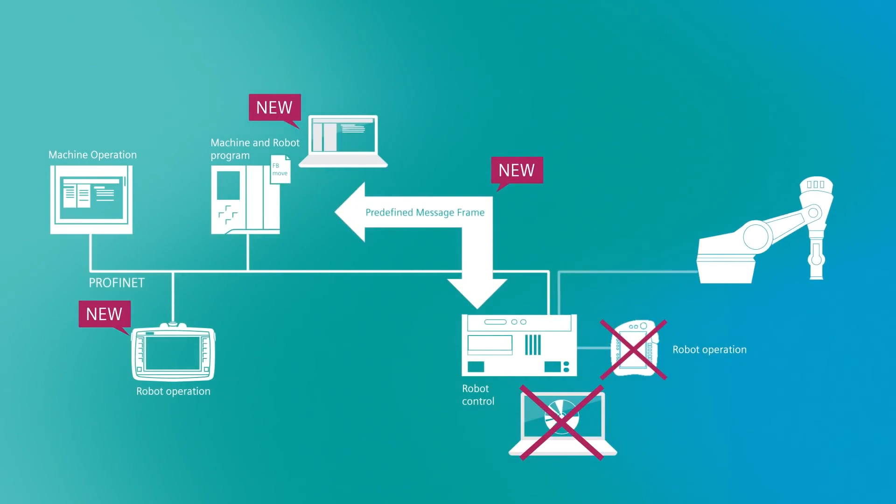Robot manufacturers such as KUKA, Denso, and Stäubli provide function block libraries that allow the robot to be programmed in the TIA portal. These libraries contain function blocks for various traversing movements, such as linear traversing or stop robot. This creates an opportunity to perform complete engineering of the system and robots solely within the TIA portal.

We also offer you the chance to perform robot operations via a Siemens HMI. For this purpose, we provide you with a standardized user interface for different robot manufacturers. We would like to show you this now in a live demonstration. Exactly, Tobias. Let's do that by taking a look at the application example in the TIA portal.

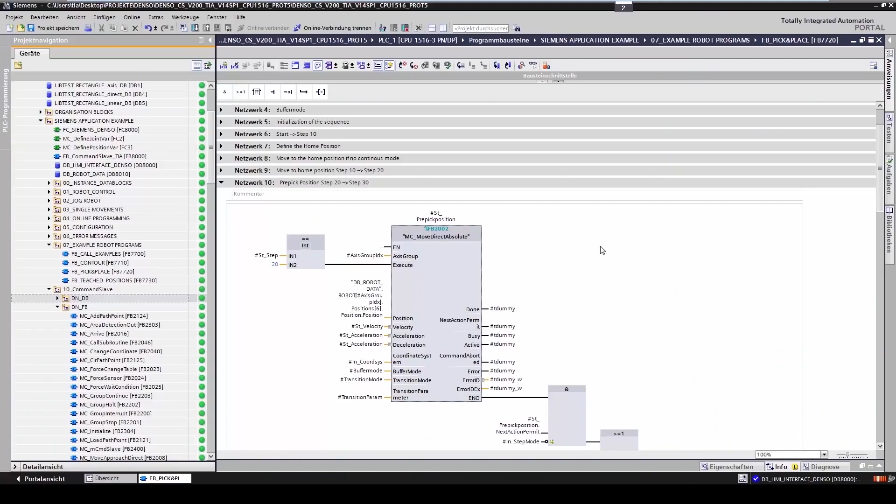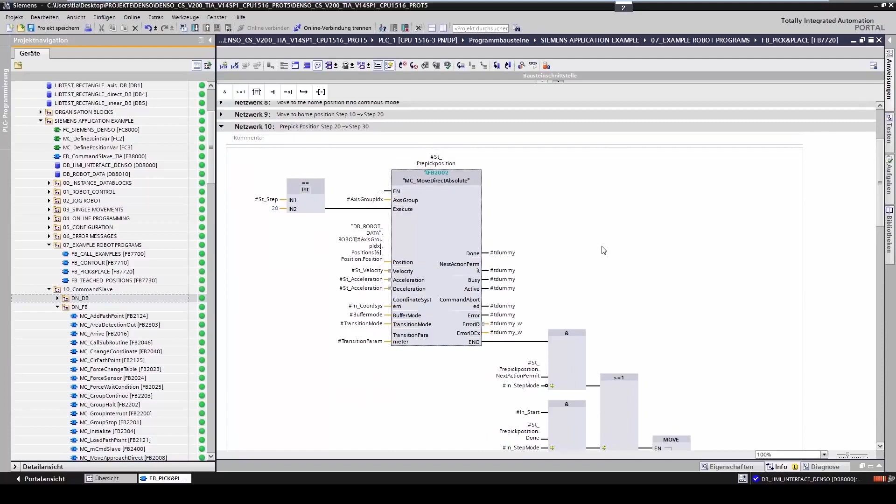In this practical example, you will find the Denso library for the TIA portal and various functions that we have prepared for you. You can also see an example of a robot program where different commands have been called up. We've also prepared a new user interface for you to enable robot programming and operation. You can see the start screen of this user interface here.

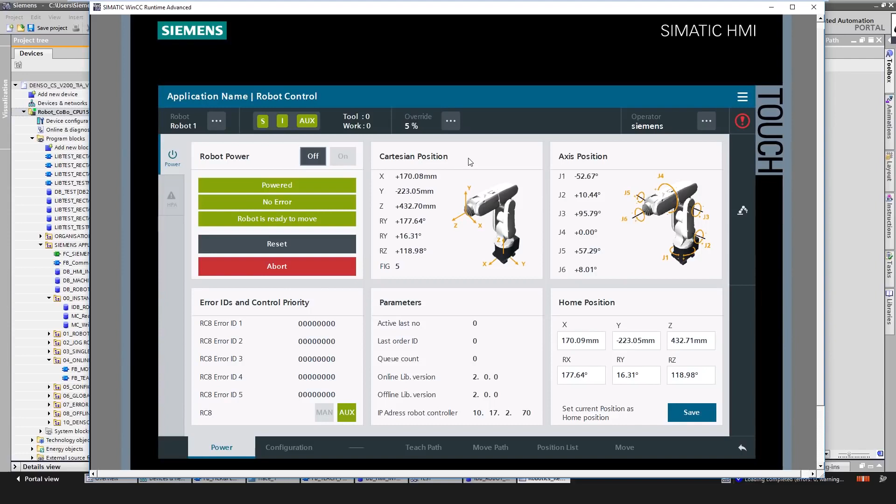And this is where you can switch the robot off and on, and you can also see various types of information about the robot, such as its position. You can also define operating ranges for the robot and assign names, enter tool offsets, or even the payload. To move the robot, click on Move. You have different options for moving the robot.

For example, you can jog the robot in the work coordinate system, but also in the joint coordinate system, or tool. You can also have the robot perform a linear traverse. In the joint coordinate system, you can move the tool center point or set point-to-point interpolation. First, we'll use the joint function to move the robot to the starting point.

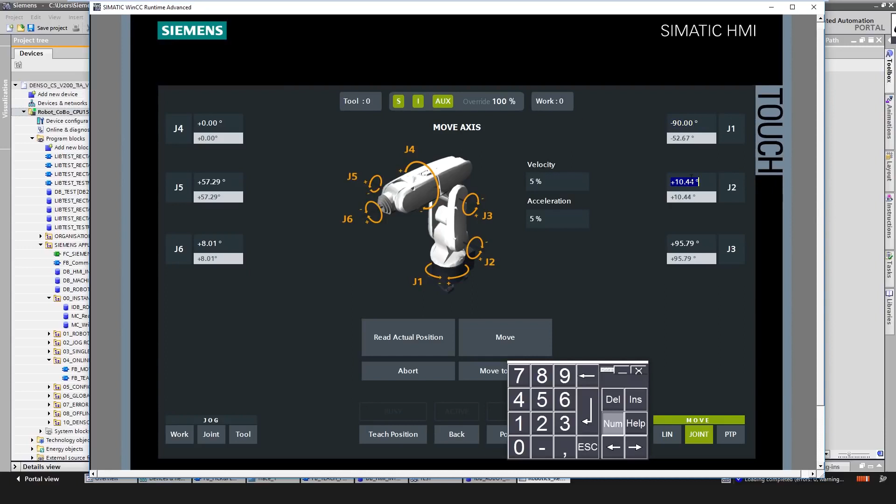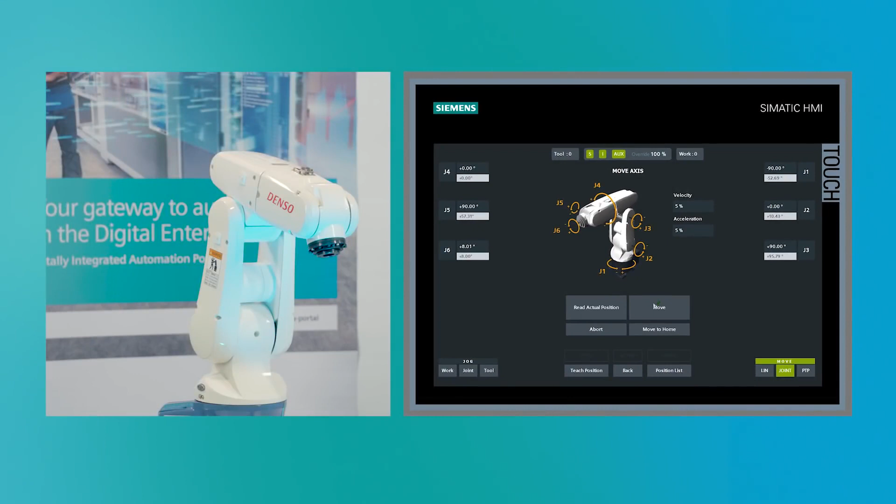To do so, first we'll read the robot's current position and input the following set point values: J1, minus 90 degrees, J2, 0 degrees, J3, 90 degrees, and J5, 90 degrees. The robot moves until you let go of the Move button. Now we are standing at the starting point of our path. We teach this position as the home position.

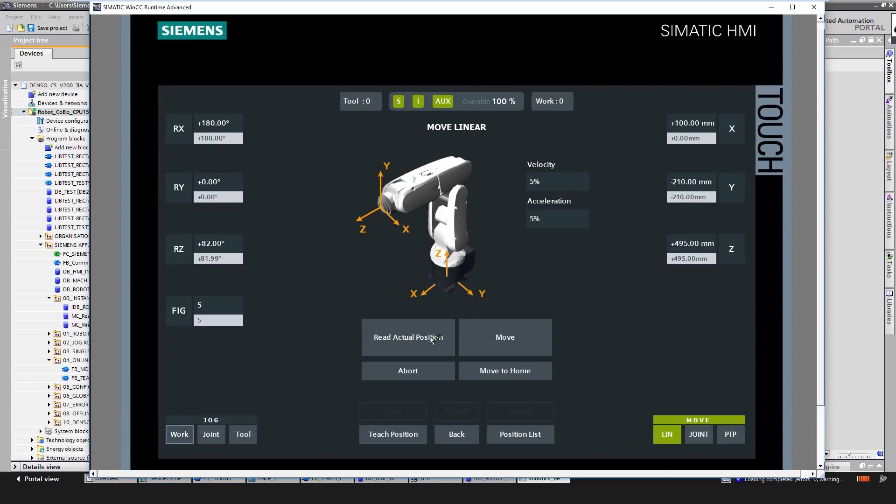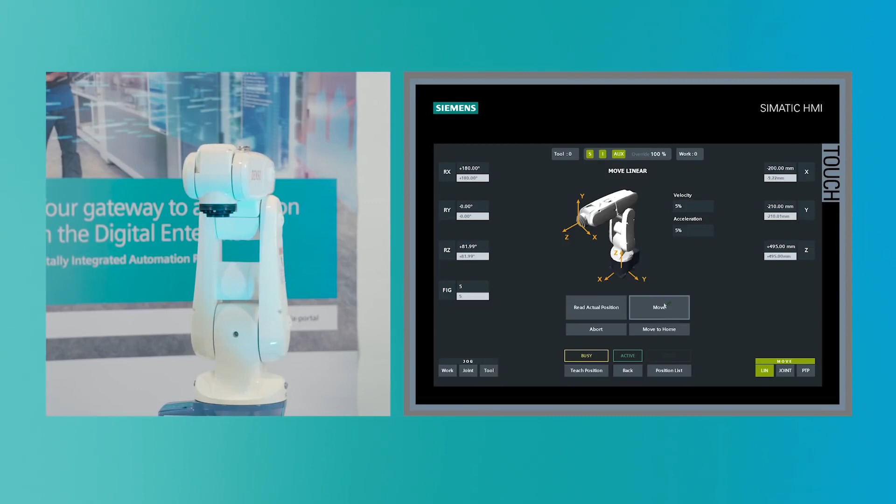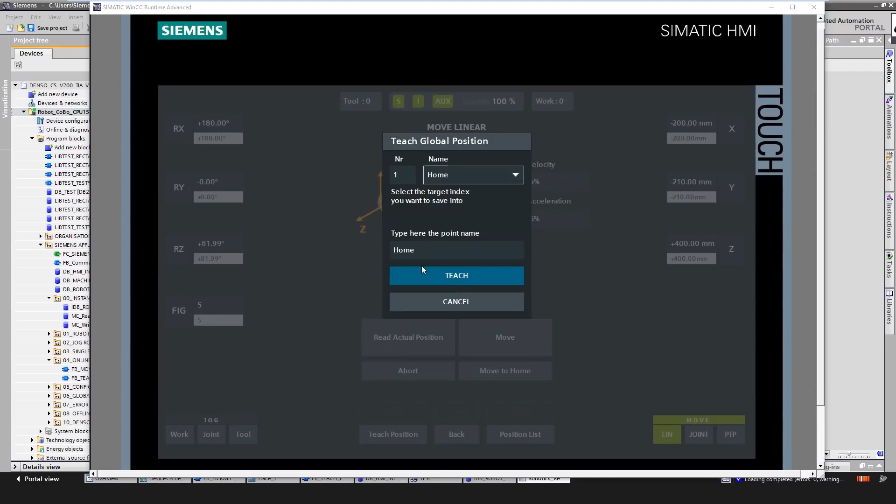Next, we move the robot to the second point. We do this in the base coordinate system. To do this, we once again read the robot's Cartesian position and enter the set point value -200 millimeters for the x-axis. We move the robot to this point and save this position as pre-pick position 1. Then we move the robot to 400 millimeters on the z-axis and teach this point as pick position 1.

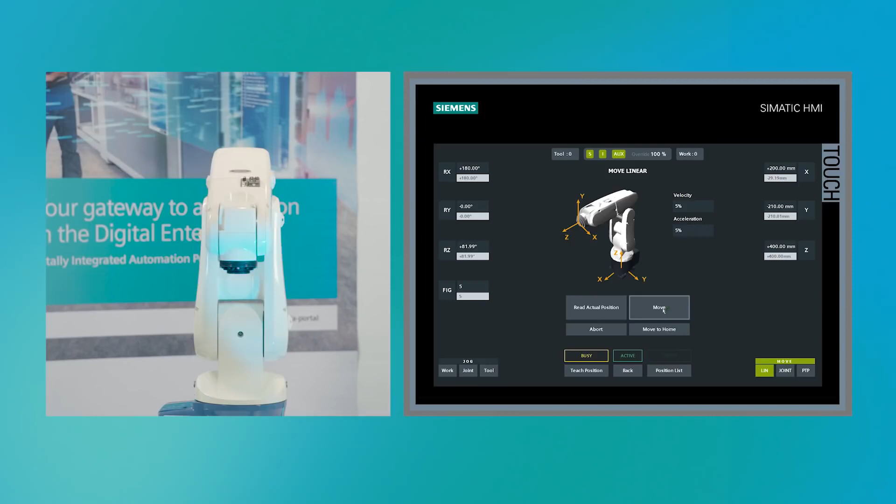Now we move to the left, from the robot's perspective, entering a set point value of 200 millimeters for the robot's x-axis. And we teach this point as pick position 2. And now we move the robot up along the z-axis to 495. And we save this point as pre-pick position 2.

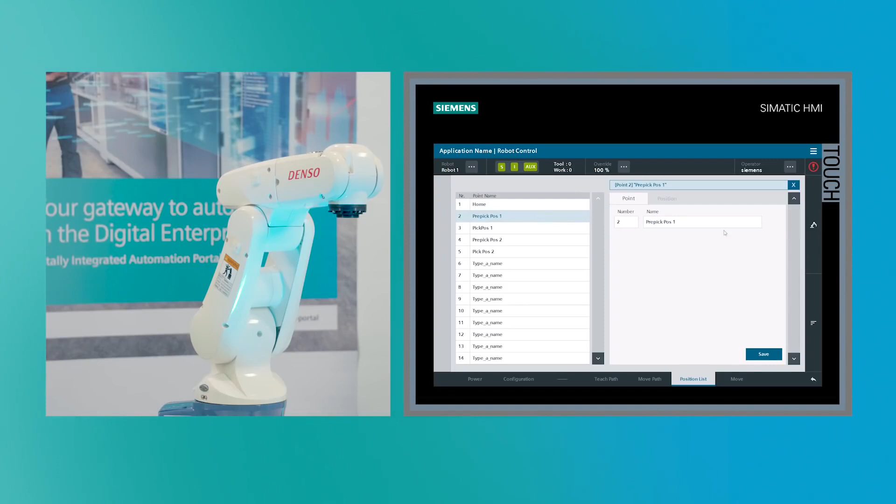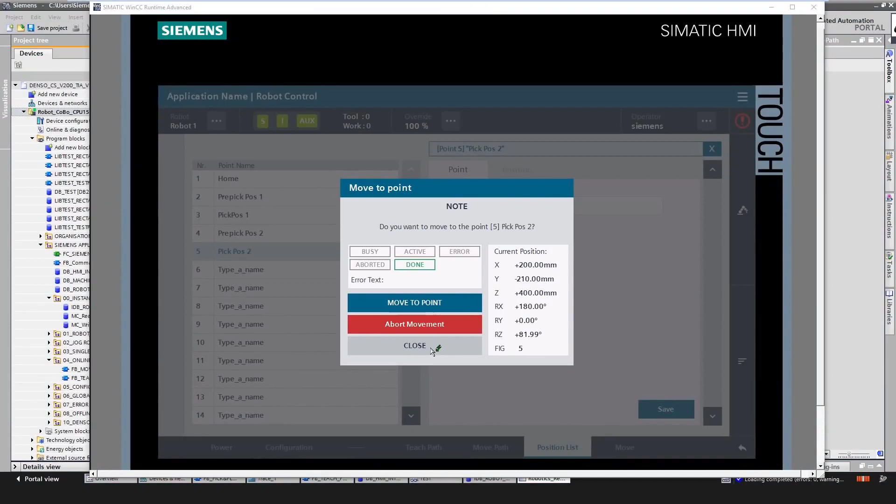We have created a point cloud, which we can see here in our position list. We can move our robot towards any random position, for example, pre-pick position 1 or pick position 2. Now we can write an online program in which we switch to the view Teach Path. So we're going to use Path 1, applying all the positions from the point cloud that we have taught.

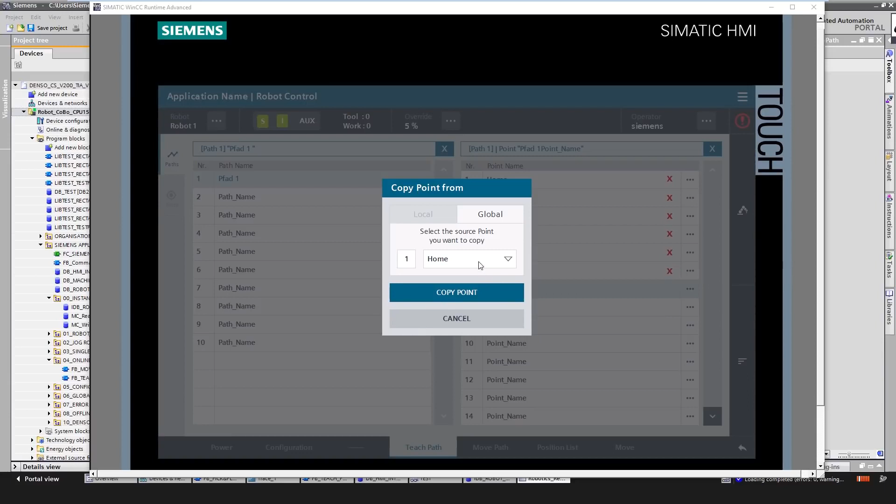The first point is Home, and the second point would be pre-pick position 1. The third point would be pick position 1, and the fourth point back to pre-pick position 1. For the fifth point, we move the robot to the left side, from the robot's perspective, to pre-pick position 2, and then to pick position 2, and back to pre-pick position 2. The last point is Home again.

You see an X mark here showing each point. That means that for each point, we still have to adjust a parameter, namely the motion type. With this parameter, we define the type of interpolation of the movement. In other words, P2P, point-to-point, or linear. For each point, we save this parameter as linear.

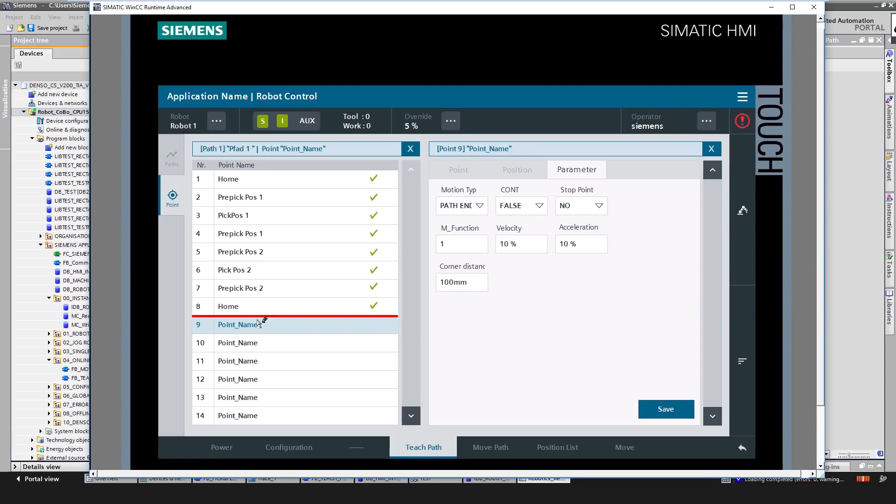And when the points have been completely defined, green check marks appear in place of the red X marks. Now we have green check marks everywhere. So the program is properly defined and ends at this red line. Now we would like to test the program which we have written online, namely Path 1. To do so, we activate the step mode, set override to 100%, and launch the path movement.

The robot is located at the initial point, Home. Second point, pre-pick position 1, pick position 1, and back to pre-pick position 1. Now left to pre-pick position 2. Z downward to pick position 2 and back to pre-pick position 2. And back to Home. Now the program has been tested, and we can start it automatically. Thus, we can see the entire routine that we have programmed online.

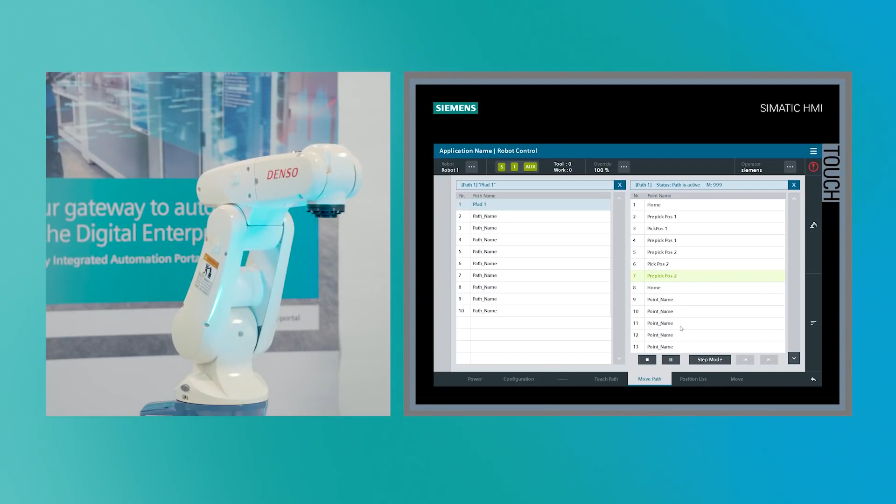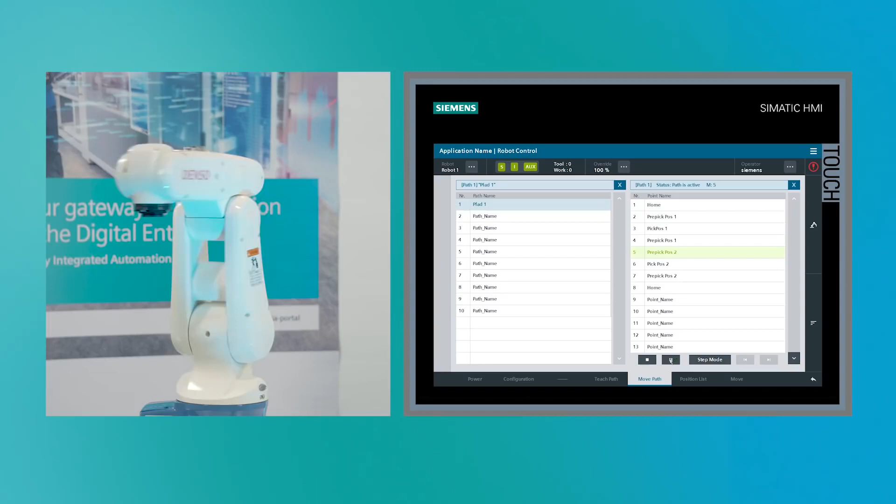Of course, we can also adjust some parameters for this path, such as blending or moving faster for more acceleration. We start the same path again and see that the robot is blending and moving faster. By doing this, we have completed the robot program. Yeah, and that's all there is to it.

Thank you, Ganesh. Let's summarize the benefits one more time. One engineering environment for you and robots, a uniform operating philosophy, manufacturer-agnostic robot programming, and last but not least, identical faceplates for the different robot manufacturers. As you can see, robot programming can be that easy with the TIA portal.